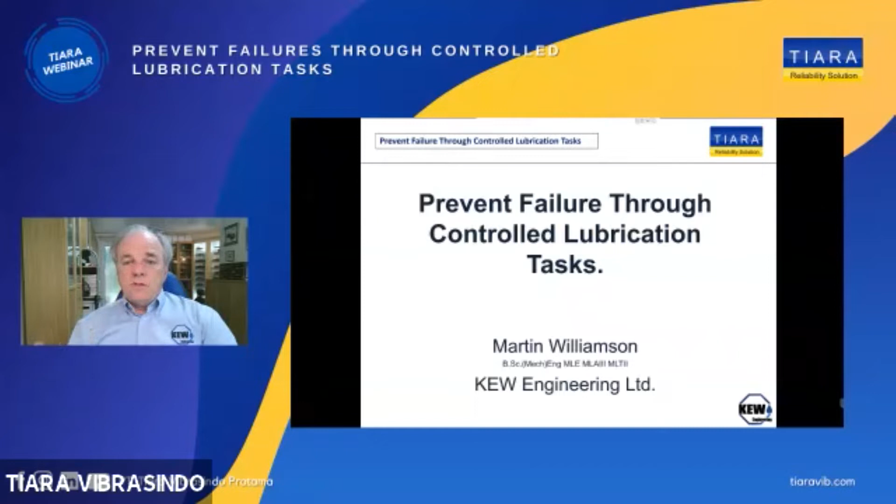Thank you and welcome to the presentation, introduced by Chandra, about preventing failure through controlled lubrication tasks. As you saw from the introduction video, we need the knowledge to do the job right, and part of that would be training. But the other part is also providing procedures and steps so we get consistent performance. As an overview to this webinar, let's look at why we need procedures, how to create them, and where all of this fits within ISO 55,000, particularly where the new ICML 55 standard fits as a subset of ISO 55,000.

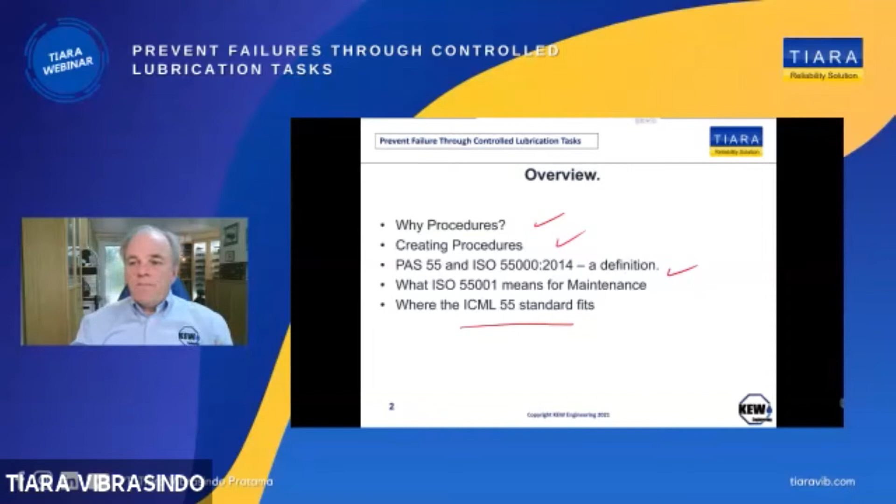So if we begin by looking at why procedures, why do we need procedures in the jobs we do? Well, research done by Drew Troyer, a good colleague and friend of mine, for an article on Reliable Plant Magazine looked at the issues with what goes wrong in the plant, why people perceive things go wrong. Part of it was procedural problems, not having the correct detail in the procedure. The other part was personnel and human error, not knowing what comes next, not being properly qualified and trained. There were other issues too, which came down to training, design, and management oversight, all discussed in that introduction video.

The ones I want to focus on here are the issues relating to the procedural problem and the personnel issues, because clearly if we have properly documented procedures for our tasks, then we get consistency and there's no excuse for not knowing how to do the job right.

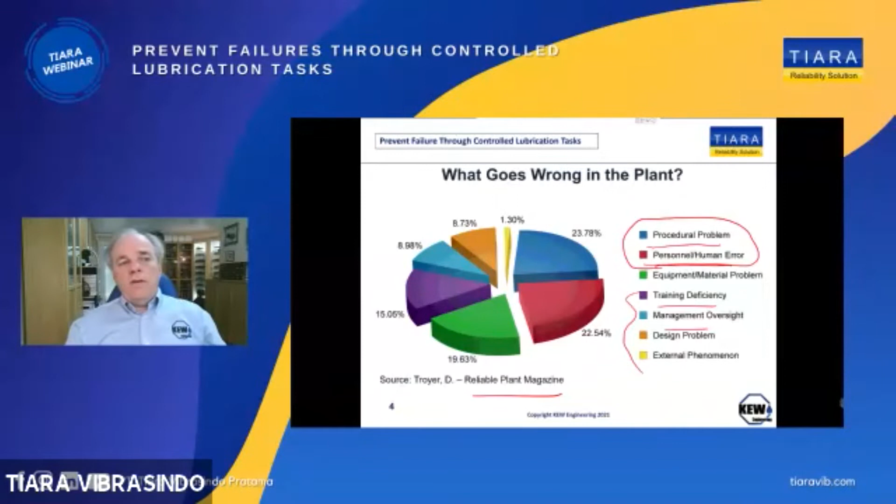You may think that greasing a bearing or changing the oil is a simple task, but there are so many things that can go wrong, and people will attempt to do these tasks in different ways. So what we want to make sure is we're providing the detail through the procedure to ensure that problem doesn't happen.

And of course, when we look at some of the typical human failures, our problem is we employ people because they have a qualification. We employ a maintenance engineer because he has an engineering qualification, maybe an engineering degree, and we expect that because they have that qualification, because they have that knowledge, that they also have the skill.

Skill is not something that you get with a qualification. You get your qualification from university, from college, that qualification says you know the knowledge associated with the work. But what it doesn't do is it does not give you the skill to do the job.

And the skill comes from learning from other people in the workplace. So hence you have your mentoring programs for your new employees. Your older personnel, the people that have been employed for some time, will act as a coach or a mentor or a tutor to show people the actual skills they need for the specific task.

And this is where the differentiation lies. We can have knowledge, but that doesn't mean we have the skill. We have to acquire the skill by learning on the job.

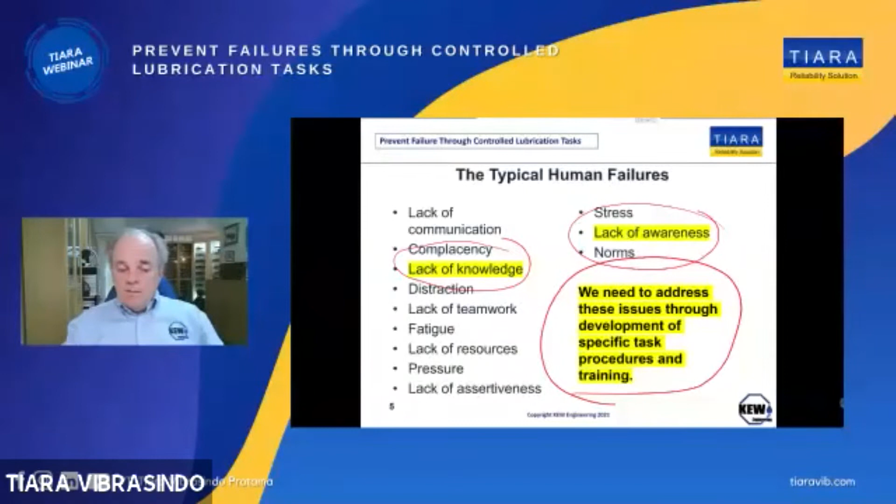Because at the end of the day, our goal is to do the right work in the right way. Because often we're doing the wrong work in the wrong way.

For example, we have a lot of planned maintenance activity, and we carry out the planned maintenance tasks without properly understanding why we have to do that. And that planned maintenance activity sometimes is not necessary, and sometimes it is necessary, but it's knowing the difference between the two.

And this is where we need to have procedures to identify that, standard work plans and procedures that help to identify when the work is necessary, but then to make sure that the work that we're doing fits with the tolerance, the quantity, the quality, the materials and the tools, that we have the right tools to do the right job in the right way at the right time.

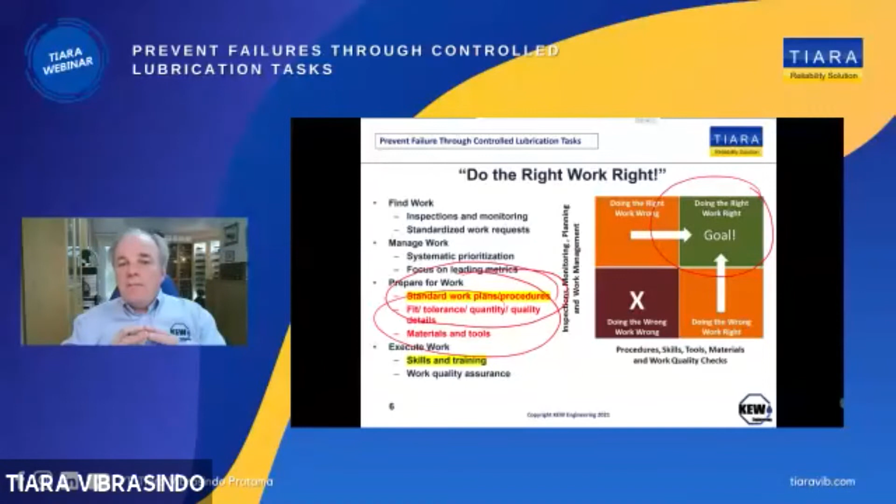So the actual purpose then of the procedures, I think, is fairly clear. And therefore, we need to look at how we can develop these procedures. And ISO 55000 is about having these procedures in place.

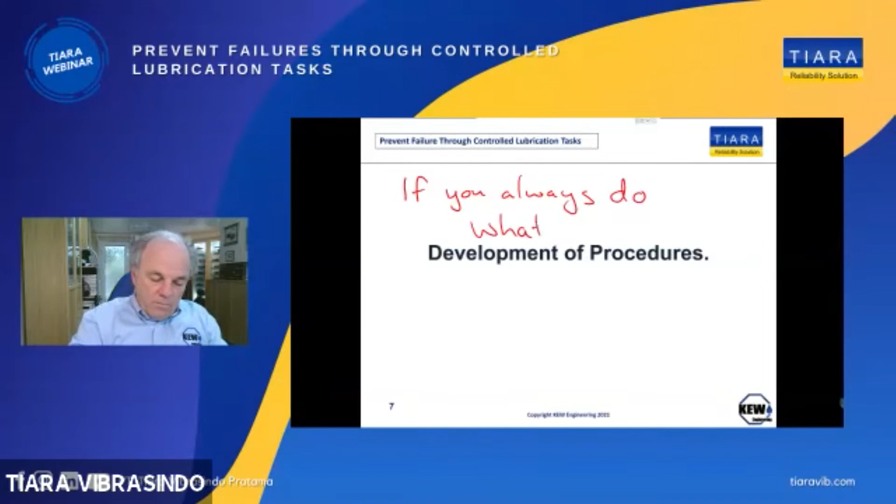The thing is, what we want to avoid is simply documenting what we already do. If you always do what you've always done, then you'll always get what you've always got.

Now that sounds a little bit long-winded, but what we're saying is, if you don't change what you've always done, you won't find improvements. Improvements come through changing what you do.

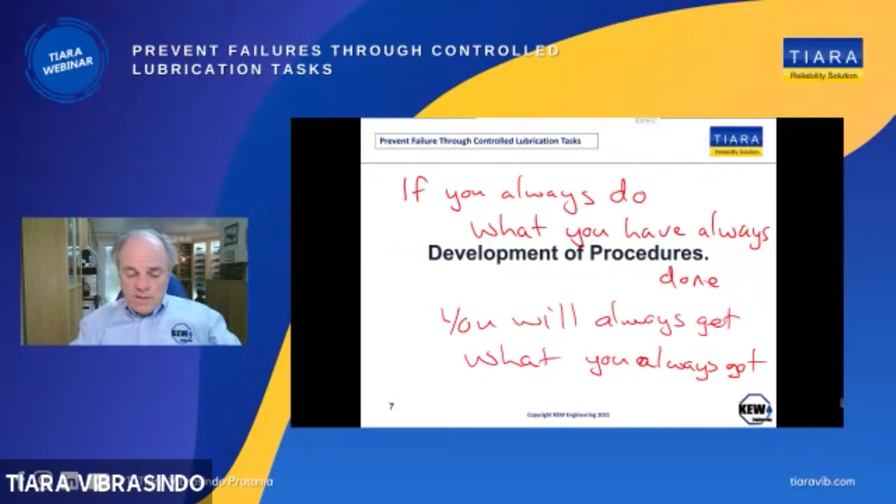So what I'm trying to say here before we start on the development of procedures is don't simply write down what you do. It's a good starting point, but if you want to bring improvements, you have to change what you do. And that means keeping in mind that as you develop your procedures, always be looking for a better way to do the task so that you can achieve the reliability gains, the reliability improvements with your assets. So looking at the whole process of developing procedures, remember that consistency creates reliability.

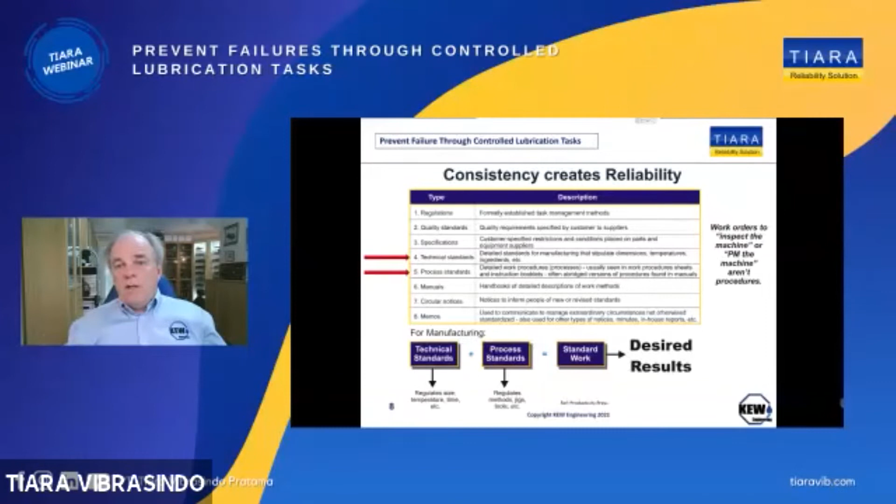One of the things I see in a country like Japan, they have a very high track record of reliability. But what I have realized is that they have achieved that reliability through consistency.

They will always follow a written task. They will always complete the process following the instruction. They don't attempt to take shortcuts. They don't attempt to rework it. They simply follow what's in the procedure.

But that consistency brings reliability.

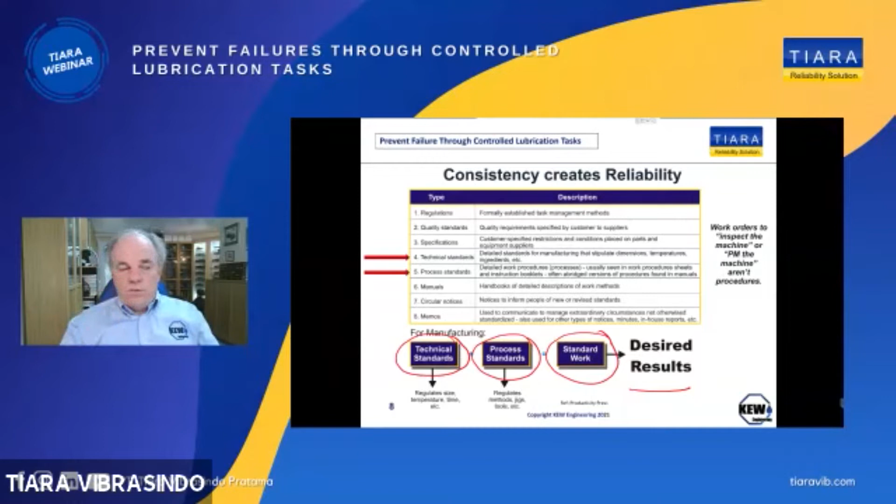In terms of procedures for maintenance, we expect to find these desired results by taking the technical standards and the process standards to create standard work. That's our desired result, the goal we're trying to achieve. The technical standards are detail standards, manufacturing standards that stipulate dimensions, temperatures, ingredients. The process standards are the detailed work procedures, usually seen in work procedure sheets and instruction booklets. By combining that, we can start to put the detail in place for our maintenance procedures.

And the benefits of procedures-based maintenance is that with these written, documented, and controlled procedures, we end up with a clear defined preferred practice. We have consistency and continuity, and we reinforce what we want as best practice. It also helps define the training and certification requirements needed to undertake the task. Most importantly, it enables improvements in safety, in environmental compliance, and that has a major impact for climate change. So clearly there are a number of benefits that relate to having controlled and written documented procedures.

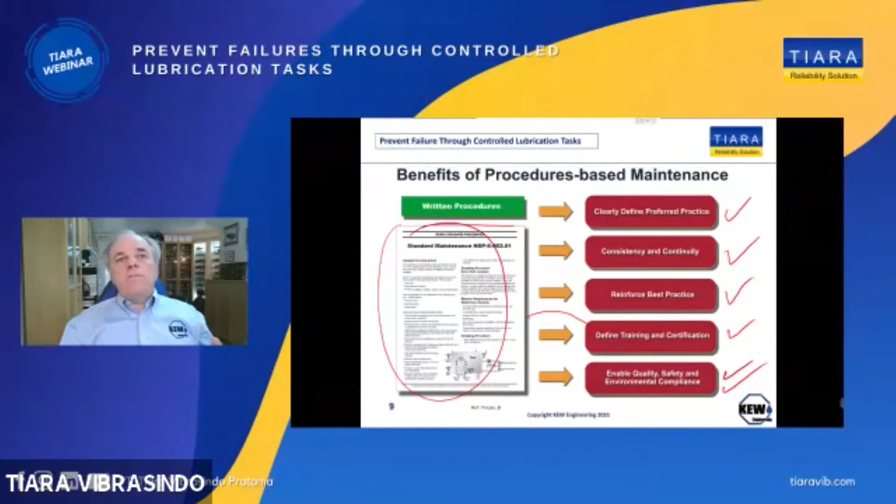When we look at a typical procedure, for example greasing an electric motor, a simple work instruction, we make the assumption that anybody can take a grease gun, walk up to the machine, attach it, and start pumping grease. But often we end up with guesswork because we don't tell people what grease they should be using, or what quantity of grease they should be using.

So in a very clearly defined work instruction, in a very clearly defined lubrication procedure, we have a number of steps: remove the dust caps from the grease fittings, clean the grease fittings with a clean lint-free cloth, inspect the grease fittings to make sure they're not damaged, and if necessary, replace them. Then apply that many shots or that quantity.

Now notice we don't just say shots, we say the actual quantity in grams or milliliters of the actual product to the drive end bearing, and the same again, but notice it's a different quantity for the non-drive end, which often happens on electric motors, especially one like this with a belt drive. There will be a difference in the quantity of grease to be applied.

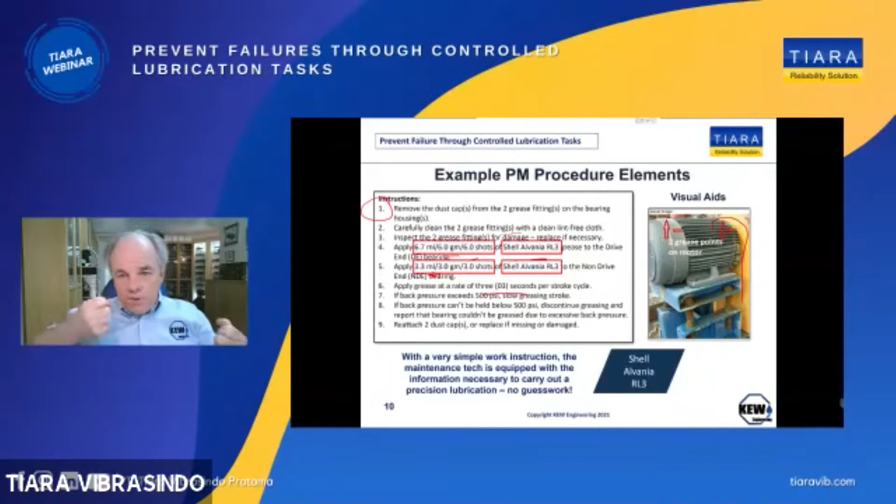And if we find there is back pressure as we're applying the grease, it could be that the feed tube is blocked with old hardened grease. So we're saying don't grease if there's too much back pressure, because that means there's a problem. And if we try to overcome that back pressure by generating more pressure, the grease gun is a powerful hydraulic tool that could then damage the electric motor if we were to persist in trying to clear that blockage.

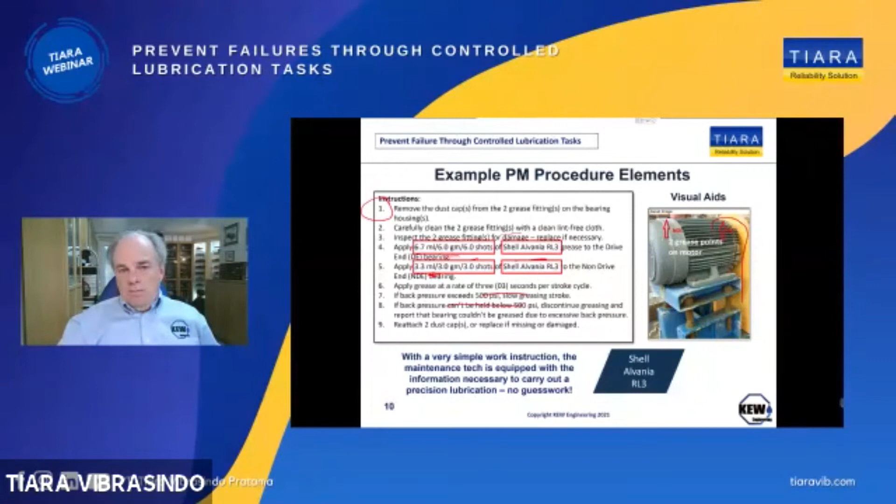So consequently, having these written work orders helps to identify the process. Now obviously, for someone who goes out greasing on a routine basis, this will become second nature to them. This will become straightforward, something they can remember without having to look at the detailed bullets.

And all they're going to want to see when they get to the machine is a reminder of how much grease goes in at each point. But the focus I'm wanting to give here is that with having this written procedure, if you get someone new to the job, they've got something they can reference on how to do the job properly. And it's also something the mentor or coach can use to show the pupil how to do the job right, and we've got that consistency then.

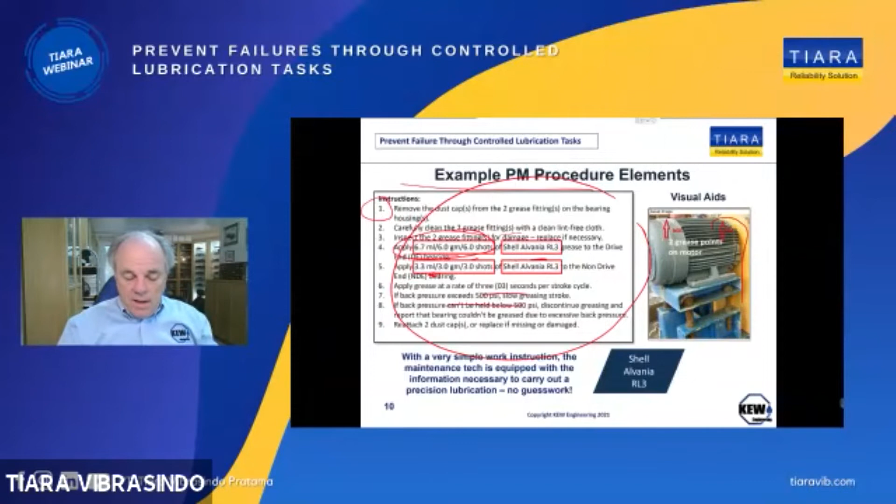That's preventing the heat dissipating from the motor, and that will in turn reduce the life of the motor. So there's lots of things we can be doing here.

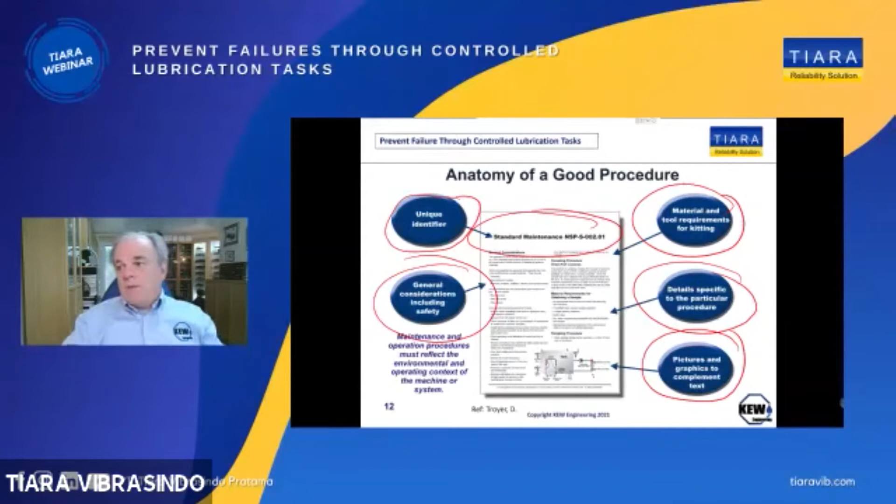So clearly then, in terms of the procedure, we want each procedure to be linked to a particular asset. And that means we need to make sure we put the detail there. As we say, the devil is in the detail, or the best practice is in the detail.

The wrong kind of procedure would be like this: check oil pressure, check temperature, grease the electric motor, tension the belt. But I have seen numerous work orders issued by the maintenance planner that look exactly like that. So for a typical conveyor, that work order I have seen a number of times, basically saying grease the electric motor, check the temperature, tension the belt, etc.

Now, what we really want is to ensure that we give the details. So confirm that the oil pressure is between those two points. Be more specific about what you want in the inspection process. Be more specific about where that temperature should be at.

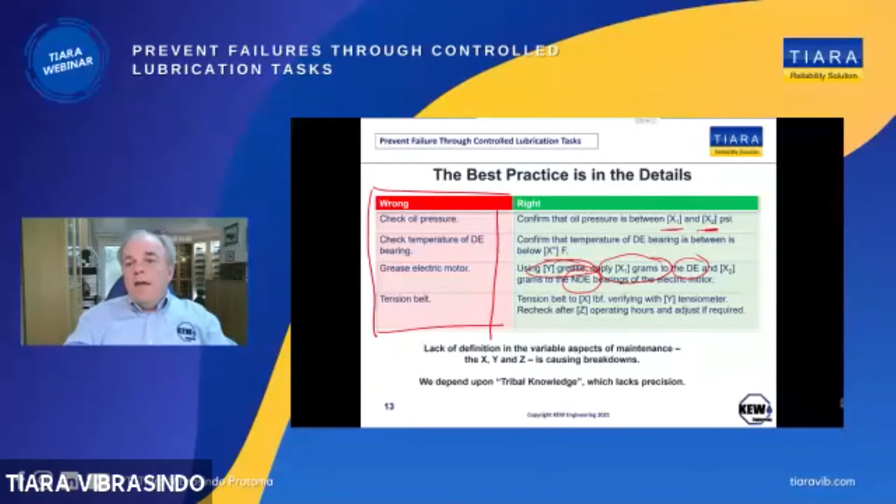And be very specific about what kind of grease, how many grams of grease, at which point, drive end versus non-drive end. And then when it comes to tensioning the belt, make sure we're specific about the tension required in terms of the force and how to check that, what tool to use, using a tensiometer.

Okay, so put the detail in the procedure, because it's the lack of definition in this kind of procedure that leads to the breakdown, because people will say, I didn't know. I did not know that the temperature should be below that point. I checked the temperature, but I didn't know that it should be that low or that high.

I didn't know that the oil pressure should be at this point. We don't give people enough knowledge. Avoid the tribal knowledge. Avoid asking your colleagues, and what should the temperature be? Oh, I think it should be 80 degrees centigrade because my machine's alarm trips at 80 degrees centigrade, so yours will be the same. It's that kind of thing that causes incidents, that causes breakdowns.

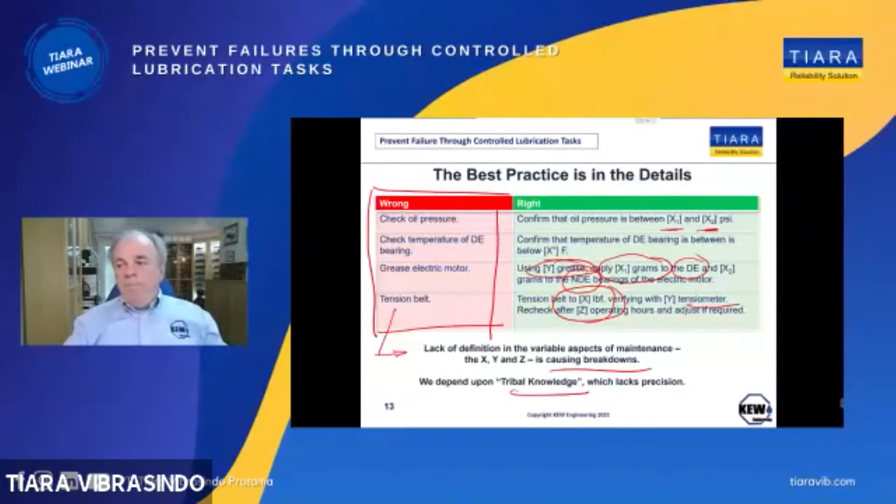Okay, so in terms of developing and setting up procedures, we have to start somewhere because it's a big program. There are lots of maintenance tasks that need to be documented. And even just for lubrication, in my experience, a typical plant could generate

2,000 lubrication tasks. And this is why the maintenance planner likes to combine these tasks into one work order so that they limit the amount of work order activity that's being created. And the problem then is that you get work orders that become multifunctional, that require a number of people, or at least a number of skills, to complete that work order. And at this point, it looks like a massive challenge, but actually we need to break it down into steps.

So we need to set up a tool to create our procedures. And in its simplest form, it may just be creating an Excel spreadsheet and creating a Word document with a mail merge function, and simply creating a template in Word to bring all the information from your Excel spreadsheet into your Word document. But once you've created the procedures, you've then got to manage the procedures.

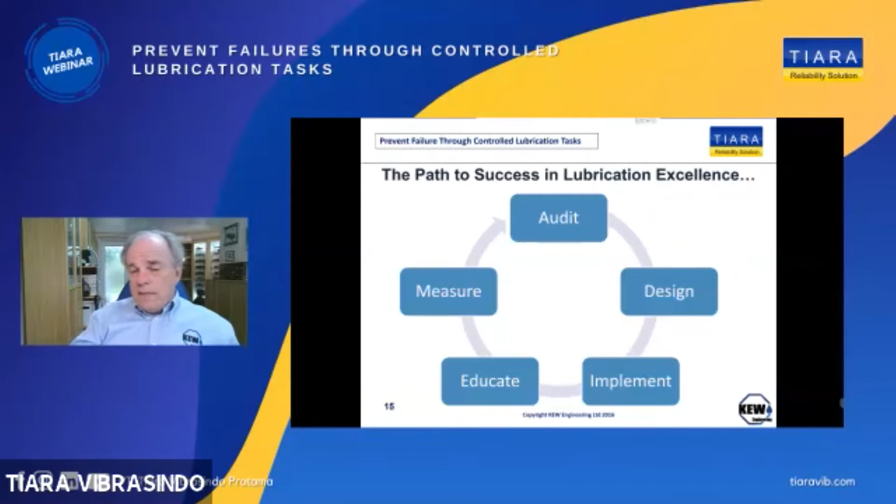We need to make sure we're always maintaining our database of procedures and keeping them up to date. So the first steps would be to audit your site, look at best practice implementation and design, then educate, measure, etc. That's the standard approach to achieving excellence in any category, whether it's lubrication or maintenance in general.

But when it comes to the actual steps, we'll need to follow some of these to create procedures. One step might be to consolidate the lubricants and apply color coding. Then survey the machinery to identify what procedures are required, and any best practice upgrades needed. Do we need to put oil analysis sampling on the machine? Do we need to move the grease nipples to a more secure, safe location away from the machine? Things like that.

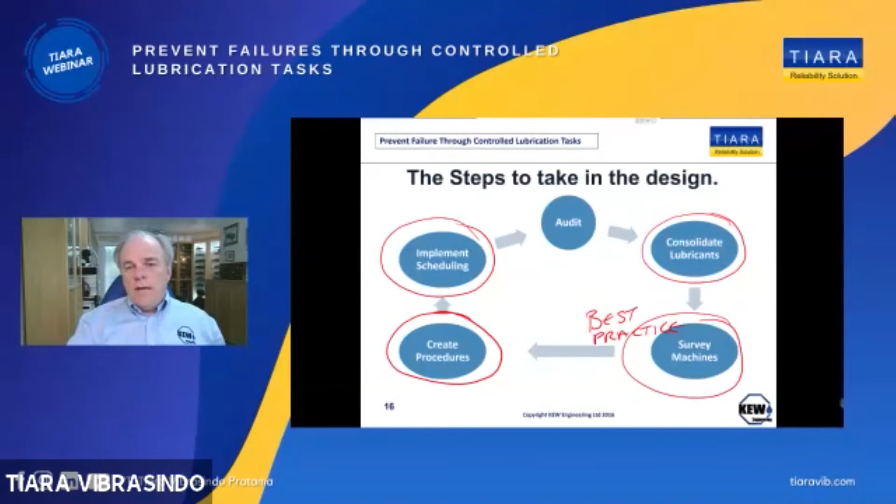And then we can go about creating the procedures. Once we've created them, we need to make sure they become implemented and part of the work order. These procedures should be part of the work order, giving instruction on how to undertake that work order correctly.

Doing an audit of your site will identify how you perform. In a lot of areas, handling and storage of lubricants are two key areas where most companies fall down. They don't score very well, particularly in handling, due to lack of staff awareness, lack of knowledge and skill, and lack of equipment to do the job right. This audit process can help identify where you need to focus effort.

But inevitably, in my experience, it's always going to be one of the key steps to implementation: creating procedures that allow for best practice.

In terms of consolidating lubricants, for those that have already done it, you could skip this step. But for those using lots of different oils and greases, why are you using so many different systems and products? It could be because of complying with the OEM warranty, or because your purchasing department is buying the cheapest product at the time. But what we want to do is try to consolidate.

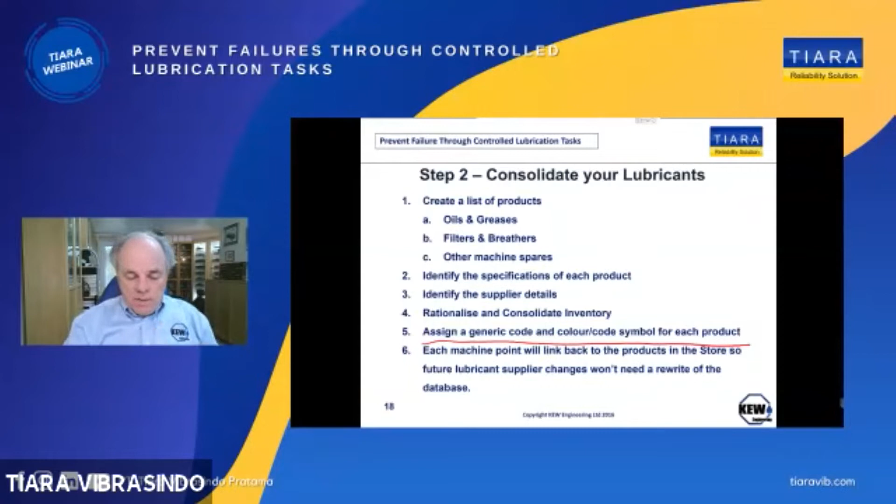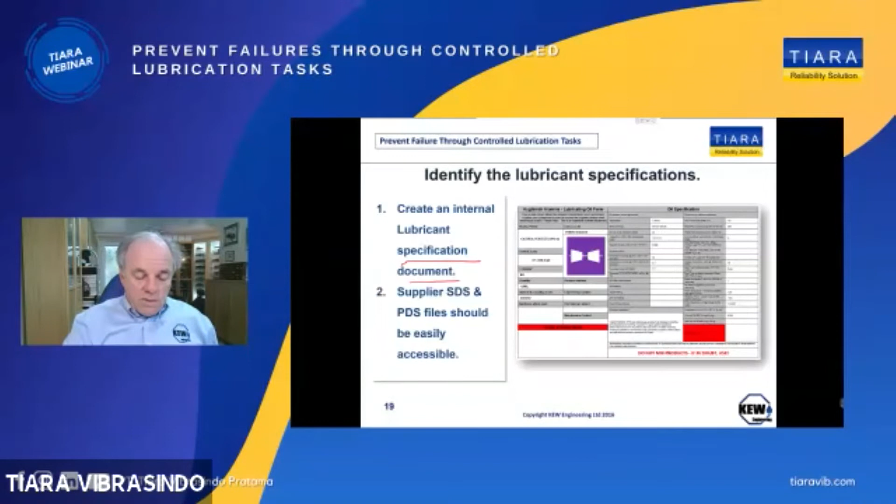So essentially, start by creating an internal lubricant specification document like you see here, and also add the supplier safety data sheet and product data sheet. By having an internal document like this, it becomes the reference—the guiding document for purchase. With this document, you are saying to your lubricant supplier, you must supply me a lubricant that matches the performance and meets the physical specifications of my internal document.

My internal document specifies the physical characteristics and performance properties of the lubricant that I want. So now you are forcing your lubricant supplier to supply you the product that you need, rather than them selling you a product they want you to have for a commercial reason rather than a technical reason.

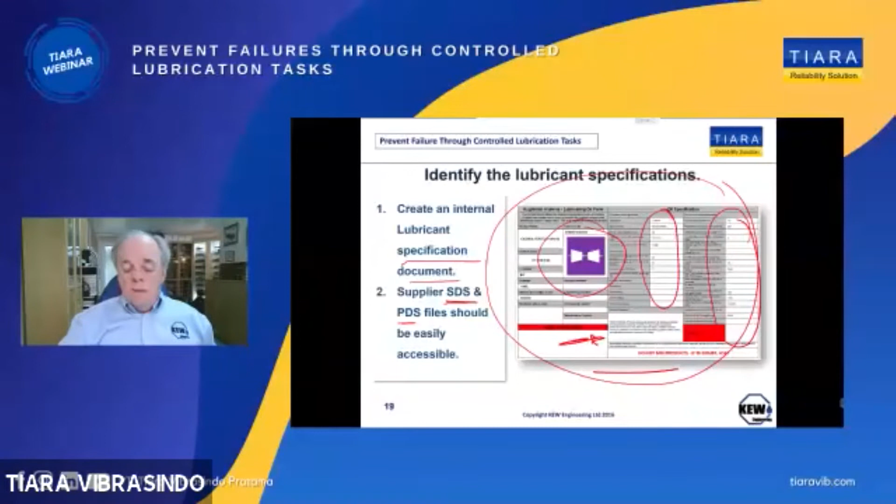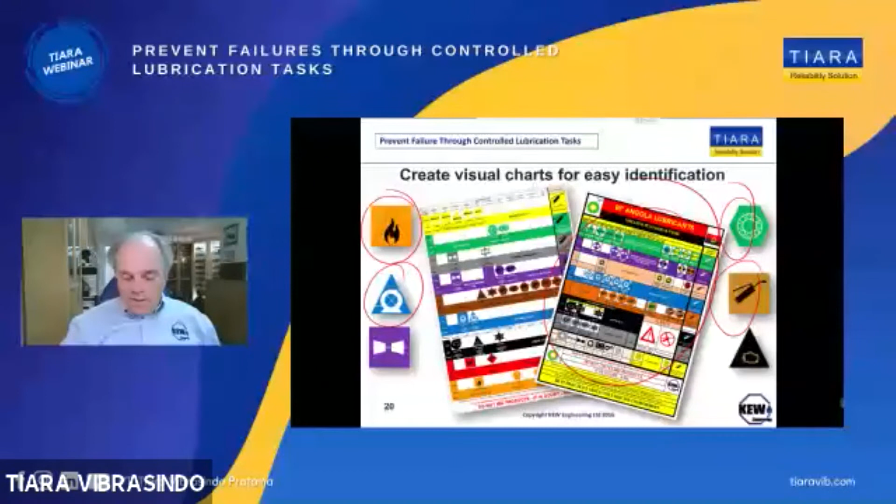Getting that color code is important, because we need to refer to that color code in our procedures. We may end up with a number of color codes all lined up on the document, which becomes our reference for all of our lubricants. We then use these symbols individually throughout the procedures, embedding them so that at a glance we can see which lubricant we're going to use within that procedure.

Now, each piece of equipment needs to have a procedure, so the first step is to map the plant. Most of you will be using an enterprise resource management system, whether it's SAP or Maximo, and you've probably got a functional location structure in place for your plant. The trouble with that is it goes down to machine level.

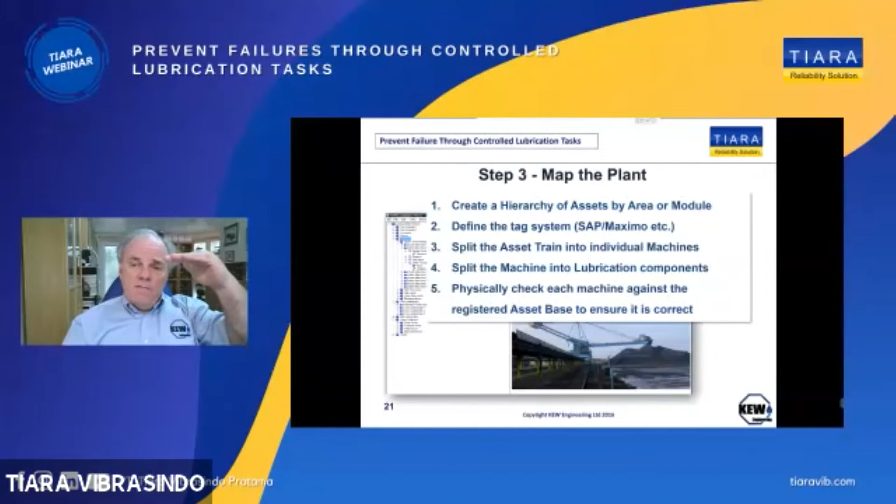It very seldom goes below machine level, but lubrication tasks are often done at a component level. So greasing an electric motor is not done at the motor, it's done on the bearings of the motor. An oil change isn't done on a gearbox, it's actually done within the sump of the gearbox. An inspection of the oil usually takes place within the tank on the turbine.

So what we're trying to say is that we need to have the plant hierarchy, but we need to be able to go to a level lower than the actual machine. So we need to split the machine components up into the lubrication related components as part of the machine, going below the level of the machine down to the lubrication component level.

Once we've done that, we can then begin to identify the actual required procedure. So we identify the asset's lubrication needs by looking at what the component part is. Is it a sump? Is it a reservoir? Is it a tank? Because for that, we're going to have to work out where we have the volume, the location of any drains, and any other associated parts that would be part of the procedure.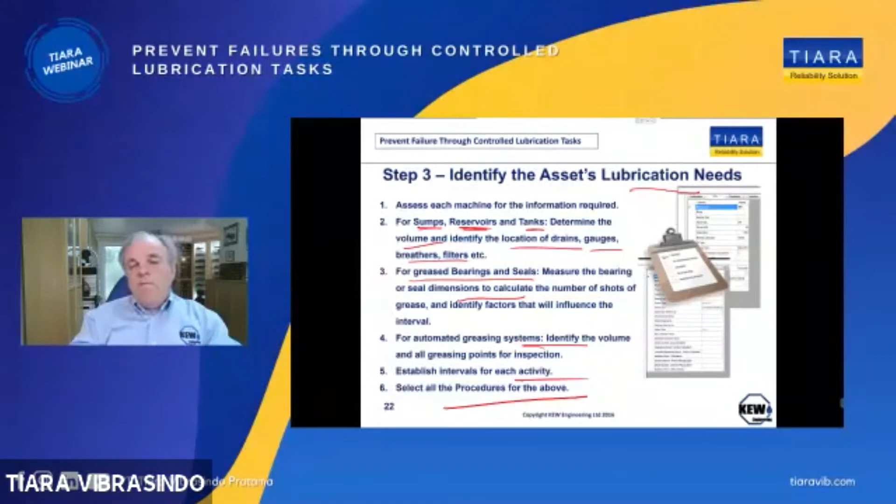Then for bearings, any bearings that are greased, we want to make sure we know what those bearings are so we can calculate the required number of shots, because a lot of times greasing schedules are incorrect. So we have to take the bearing dimensions and calculate the correct quantity of grease required. On automated greasing systems, we want to make sure we know the volume of grease required for the reservoir. And then we want to establish intervals for the activities and then create procedures for all of the above.

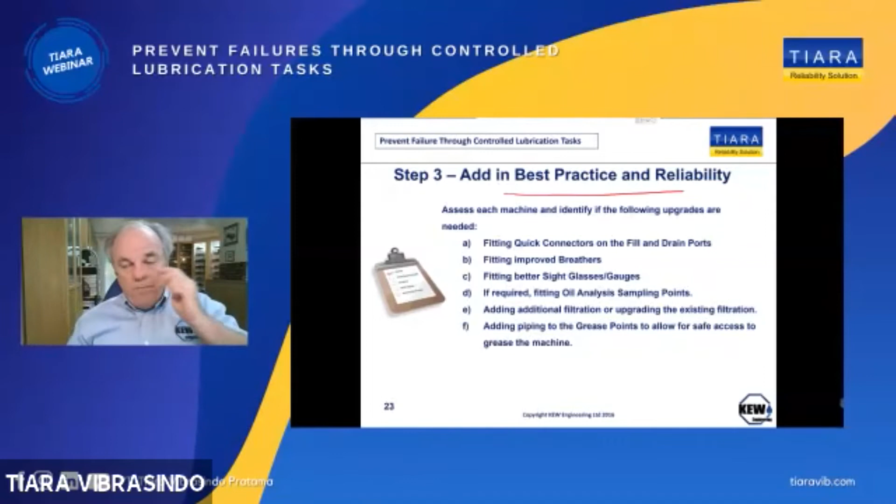We must also remember that when we look at things like your tanks, your sumps, your reservoirs, there are some best practice upgrades that we can put on the machine to improve reliability. For example, putting a quick connector on the fill and the drain port would allow us to attach a hose so that we can pump the oil into the machine through the quick connector, with the hose securely attached to it. That way the hose won't come off or slip off the system, and the oil will stay inside the hose going into the machine, which will prevent contamination of the oil as it transfers into the machine. That is standard best practice in companies we would consider world-class leaders in lubrication excellence. So it's things like that, fitting an improved breather.

The existing breathers are frankly rubbish and a waste of time. The OEM puts them on because they're cheap, and the OEM isn't that concerned about stopping the dirt because you'll have to buy spare parts. So we can improve the breathers. We can improve the situation with sight glasses. For example, we don't like using dipsticks. If we can avoid it, get rid of dipsticks, because it means lifting the dipstick out, wiping it with a cloth, introducing contamination. So sight gauges are a big improvement.

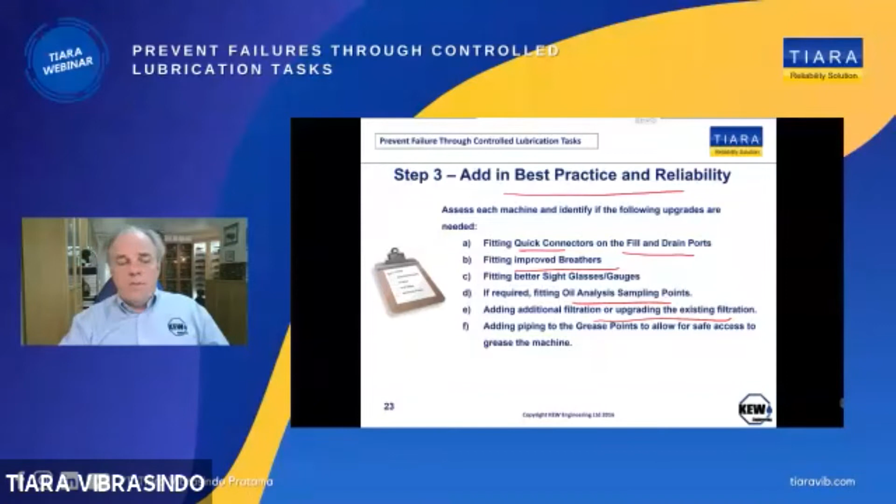And of course, as we said, if required, oil analysis sampling points should be considered as well. It may be a case of upgrading existing filtration for the same reason as upgrading the breathers. And also grease points, as I mentioned, it may be a case of extending the grease point to a safe location. We've seen instances where in order to grease the machine, it must be stopped because the safety guard has to be removed to get to the grease point. It makes sense to just lift the grease point on an extension tube above the safety guard so that it can be accessed while the unit is running, rather than having to stop the machine and interrupt production.

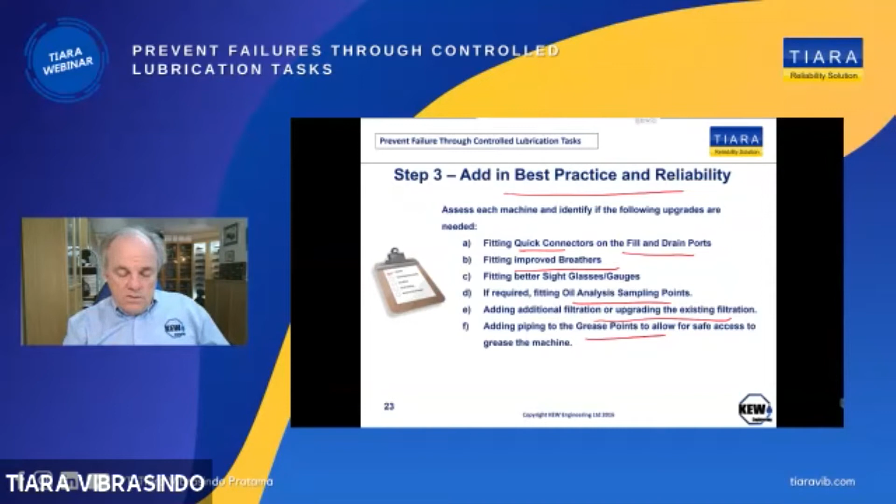Now, of course, with our procedures, we want to ensure that we are bringing in the 5 rights of lubrication. And the 5 rights of lubrication are the right lubricant, at the right time, in the right quantity, at the right place, and above all, with the right attitude.

So with the right lubricant, color coding should make sure that's going to be in the procedure. At the right time, we want to make sure things get done on time as per the schedule, so our procedures will identify the intervals required, which will then be put into your work order planning system. In the right quantity should be detailed as part of the procedure. And at the right place, there should be a photograph highlighting where the right place is, and the right place should have its own little tag identifying the quantity and the type of lubricant.

And of course, the procedure then helps to ensure that we are applying the right attitude to the process, that we are dealing with consistency to get that reliability.

So in terms of lubrication tasks and scheduling, some of those tasks are going to be planned and preventative work. That's typically general greasing of bearings, or oil changes on small volume machinery. So those are the typical planned lubrication tasks. We still want procedures for them, but that's the kind of task we might associate with that kind of machine. On the other hand, on more critical machines, we may go for a condition-based lubrication approach.

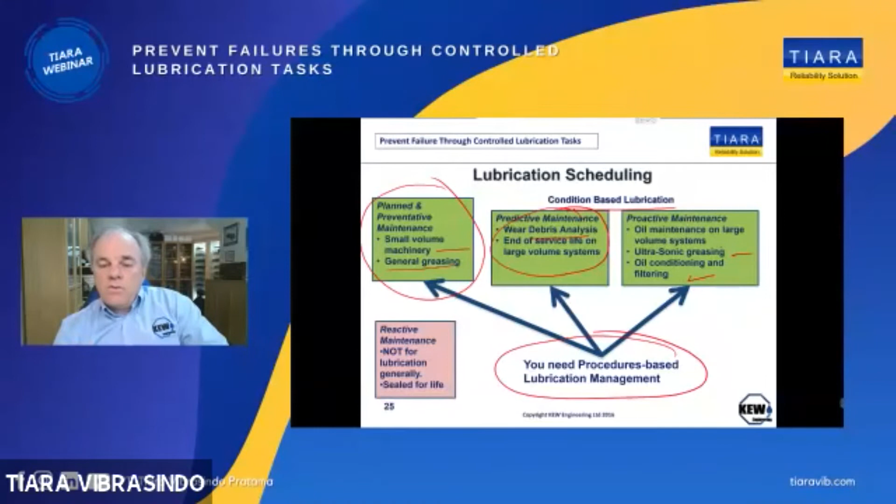So basically we want to make sure our procedures cover all of those aspects of how to do the job correctly, so that we get consistency in the process. So when we've mapped out the plant, identified all the machines, and identified all the lubrication points on each machine, then we can start to put together our actual procedures.

We want to make sure the procedure is identified, along with an identification of what skill level or resource level is required. For greasing, it may be a general lubrication technician. But on the other hand, for something a bit more complicated, we might assign it to a mechanical technician or an electrical technician. Maybe the electrical technician is the one who will grease the electric motor.

We want to make sure we also enter a time to complete the task, to assist the planner for the work order management. And then we should also make sure we put a priority on the task.

Why a priority? Well, there will be times when there's a shortage of resource and a work planner needs to know whether the task can be pushed back. Now, unfortunately, lubrication is often pushed back. So when it comes to greasing, planners have a habit of skipping the greasing schedule because they don't see it as important or as a priority.

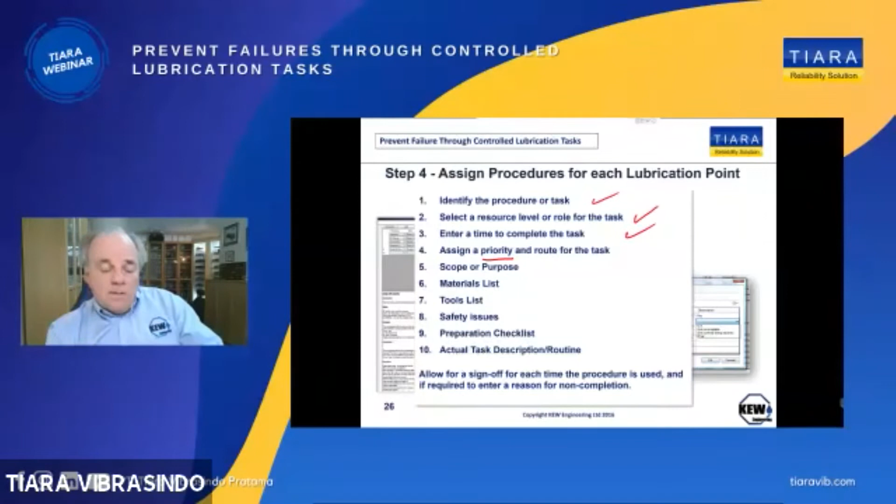So we want to make sure we have that priority attached to the procedure, so we can say it can be pushed back by one week, it could be pushed back by one month, or it could be skipped altogether. Unlikely, but we need to give some sense of priority about the task.

But also for work order planning and efficient time utilization, we should also make sure that task is part of a route. That route being a route that you follow through the plant to do the actual work, because we're going to group some of these tasks together.

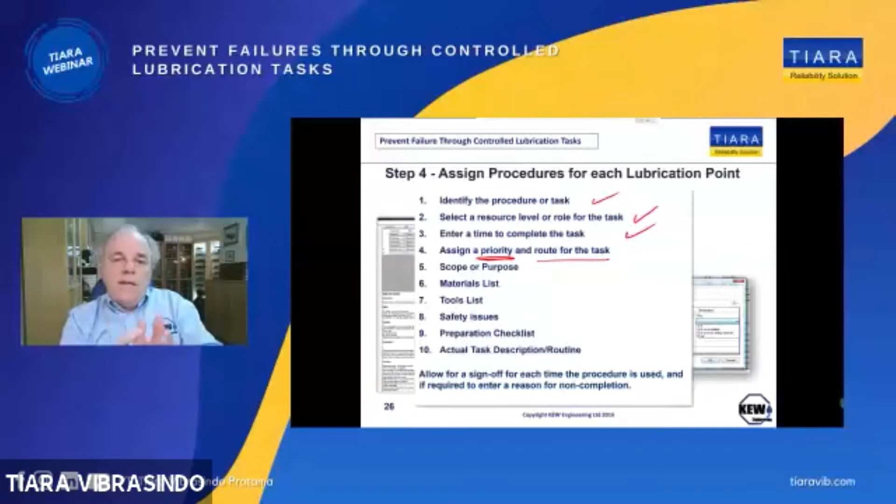So for example, it would make sense to take all the greasing procedures using product X as a grease, and then ask the lube tech to go and do that greasing with that grease gun, following a route through the plant that is most efficient for greasing all the units.

Don't forget, of course, also scope or purpose for the procedure, materials list, tools list, but very importantly, any safety issues associated with doing the task that the person should be aware of when they start to undertake it, a preparation checklist, and then of course the actual task description routine. All of this is very important as part of the procedure.

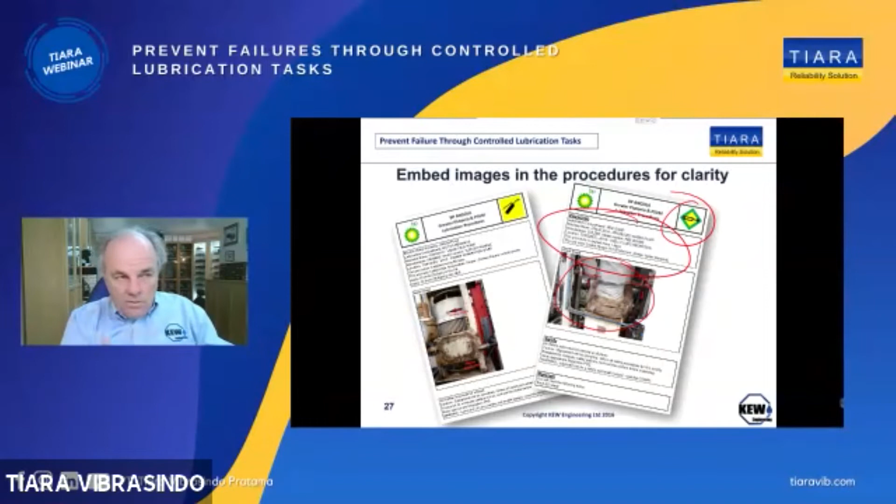Now, we've not sat down and individually typed out each of these documents. What we've essentially done is a merge of information into a template, because to be honest, the actual specific steps are all fairly similar. So it's really just a case of bringing in specific detail to this template, such as the image, the information about the oil, the actual component name, the tag number, the quantity of lubricant, etc.

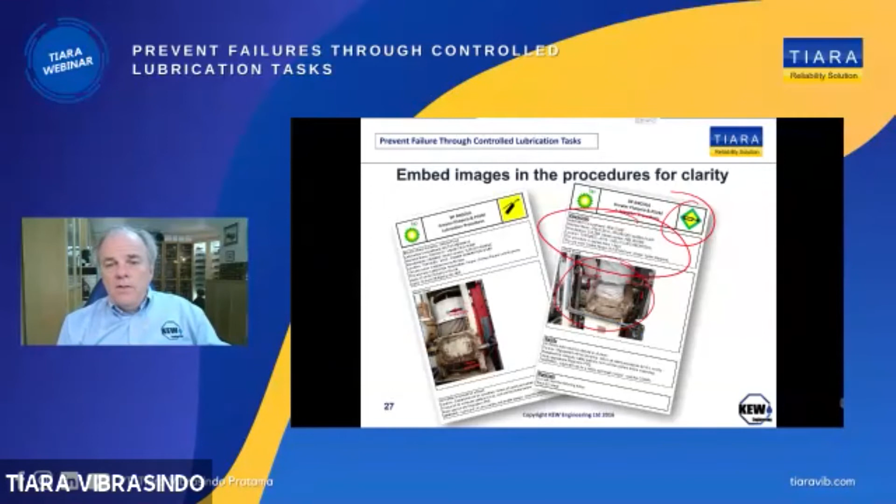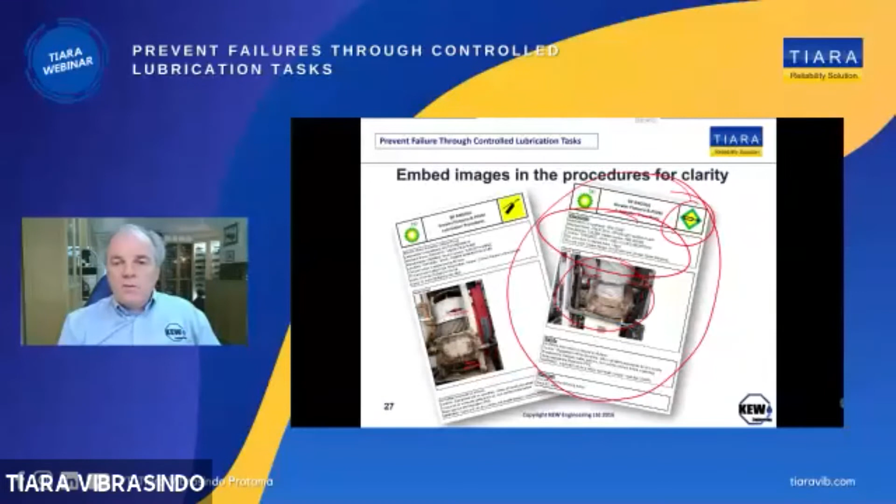Once we've got all of that into our software tool, we can generate these procedures very, very quickly. I've done this a number of times for clients using a tool I have, Cubic, where it allows me to do things, not just create these procedures, but add in tags for the machine.

So now we've got a tag for the greasing of the air blower bearings, that we can generate and hang off the actual greasing point, giving the specific detail as a reminder of what should be done, how much grease should be used, at what point, and the same again for tags for tanks, etc. Once we've got all this information into the database, we can generate the procedures literally in seconds using the template structure to bring in the specific detail.

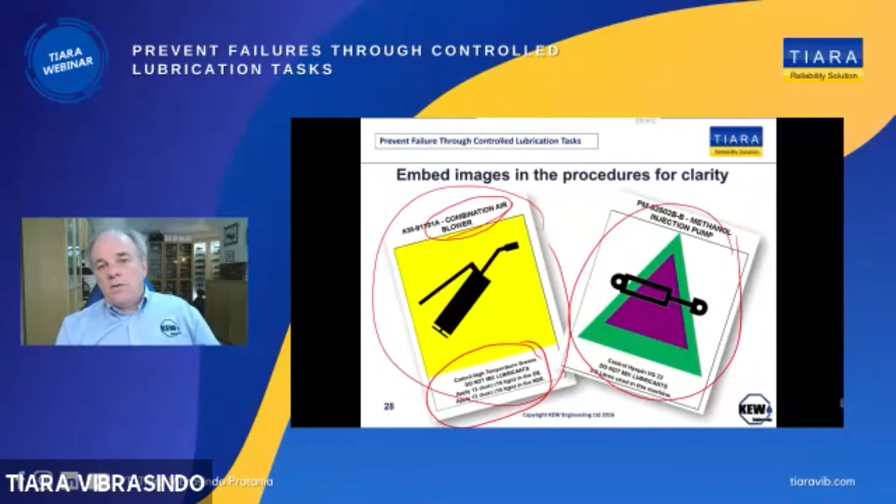And then we can create things like tags to hang on the machine. We can create other forms of tags that we can put on the drums of oil in the oil stores, for example.

But once we've got all of these lubrication procedures into the system, the planner can then begin to look at all of that information and make sure those procedures are attached to specific work orders. And of course, we have to make sure all of this works, that the routes are sensible, that the amount of tasks generated for each route are sensible and meaningful, and that we're not trying to overwork anybody or generate too much effort — that it is all manageable.

Now, once we've got all of that in the system, for reliability engineers, asset history is very important. Reliability engineers rely on the information that's been collected about the machine over the years. It helps them make judgments about which are the bad actors, which ones need the most attention.

But we can also make sure that we capture information about our machines when we go out to do these work orders, to do these procedures. A reporting system is very useful for that. It's also very useful for identifying what improvements need to be made. So if you've captured all of the information about best practice...

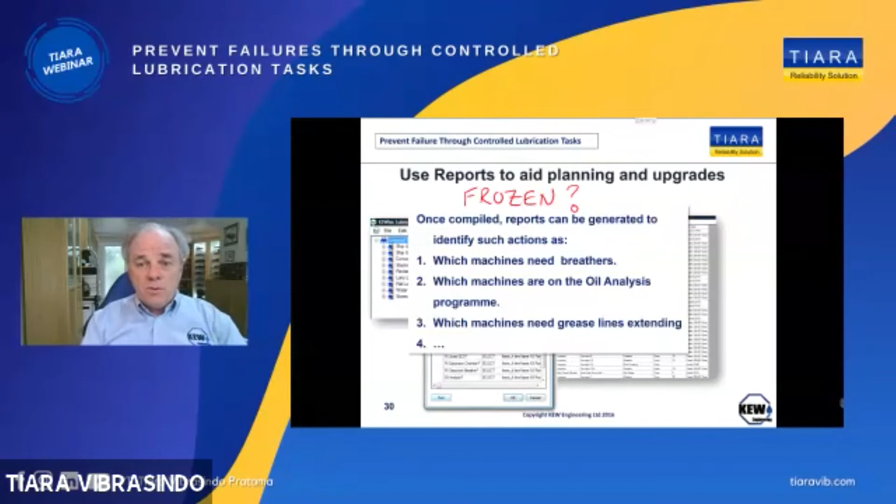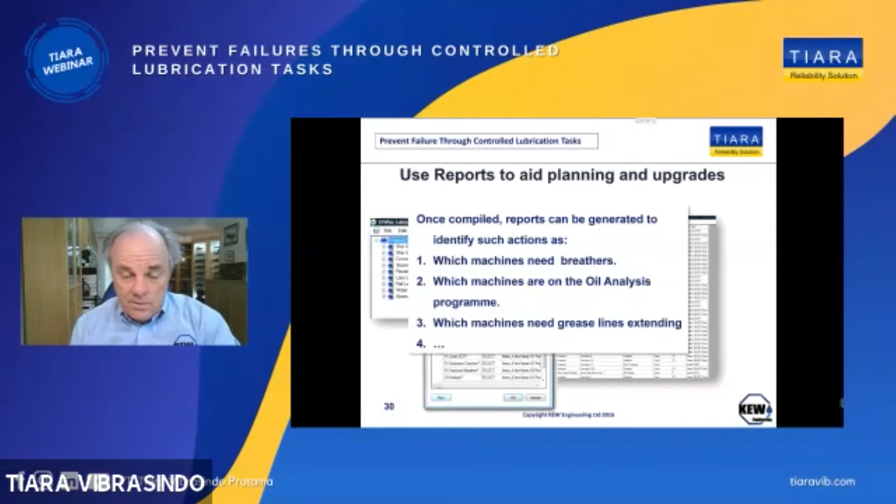We can clear that. So as I say, reports will be very useful to the maintenance planner, because the report will identify what upgrades will be necessary. Some upgrades can be done while the machine is running, but some might be required when the machine is actually down for maintenance, such as doing an oil change or something like that. Some improvements might need to be implemented as part of machine rebuilds. But don't forget, when we specify new equipment, we also want to make sure these fittings are featured as part of the new equipment specification.

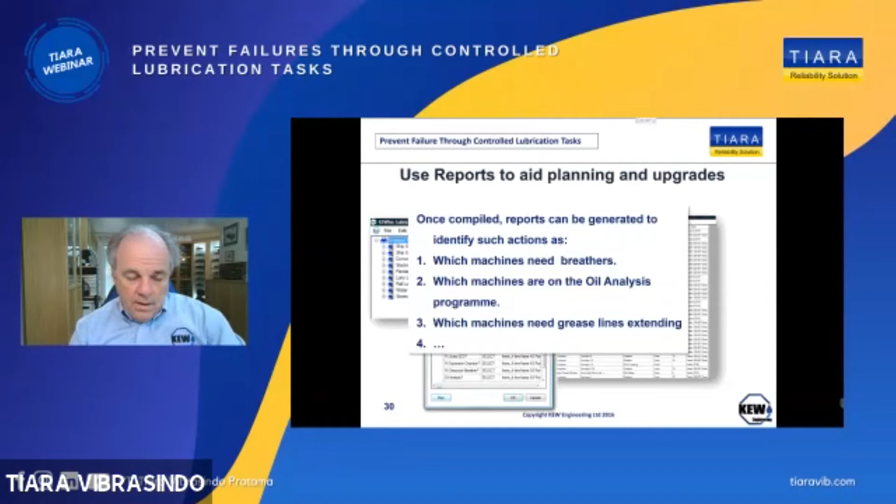In terms of the reports, they can also aid scheduling. They can identify when tasks are not being completed, what volumes of oil are in all the machines, what types of oil, and that can be run, and also just checking stock levels if necessary.

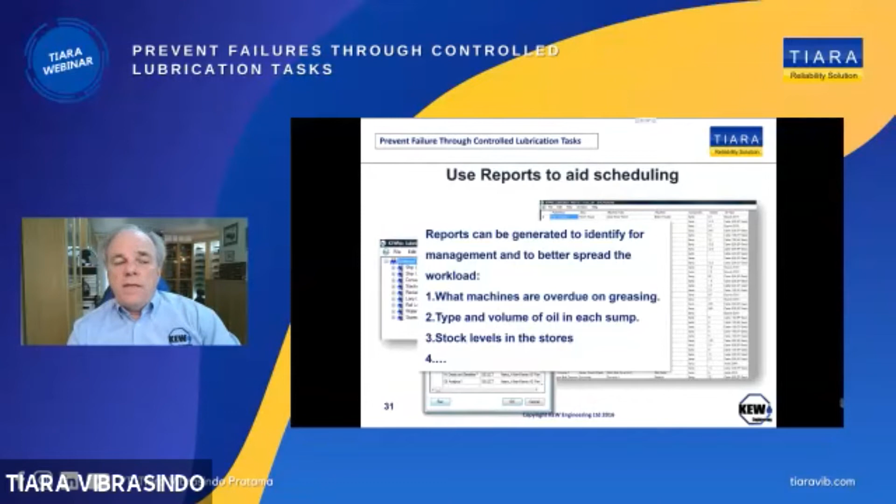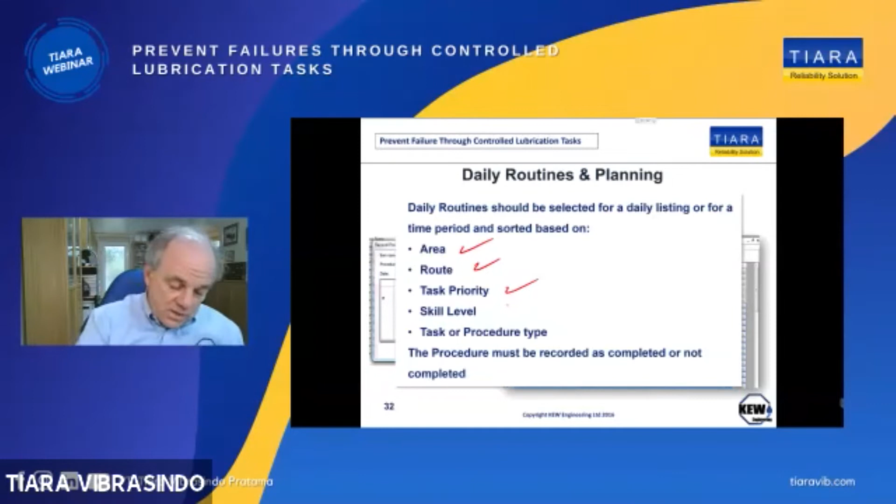The system you're using should make sure you can actually check up on these procedures. However, the daily routines and planning are obviously the job of the maintenance planner. Your procedures should identify all the information required for the maintenance planner — the area, which part of the route, the task priority, the skill level required, the actual task type — all of that should be available to the planner once you've created your procedures.

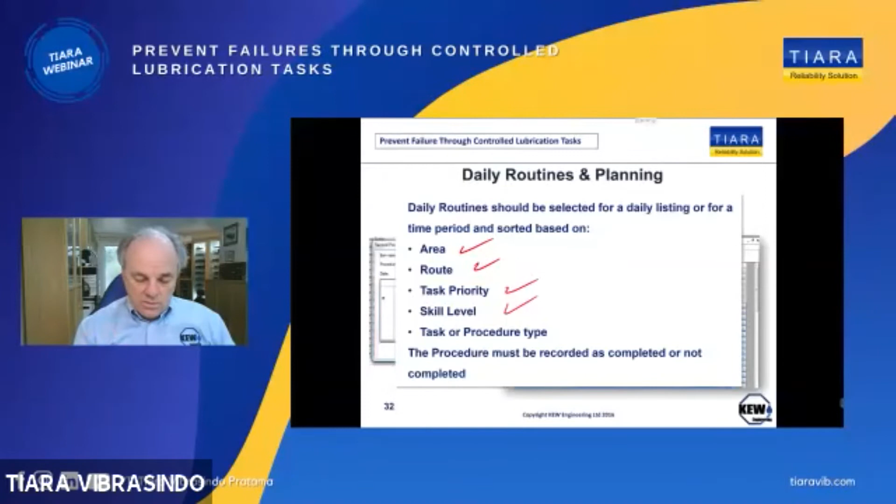Now of course also, like I said, reliability engineers want as much information as possible. So typically we want to make sure that when we're completing these procedures, we're gathering information. Like the example I gave earlier, I said motor dirty. Now if that was reported numerous times, why is the motor getting dirty? What's the problem?

Is there a way we can try and prevent that happening in the future? Or maybe motor running hot, because we can then start to collect the information, the feedback, because often when these procedures get completed, especially lubrication task procedures, they just get signed off as completed. They don't tend to gather information. But a lot of times your lube tech is actually at the machine doing these tasks and could be doing an asset inspection. And that asset inspection would then identify any other problems that need to be reported that can be acted upon.

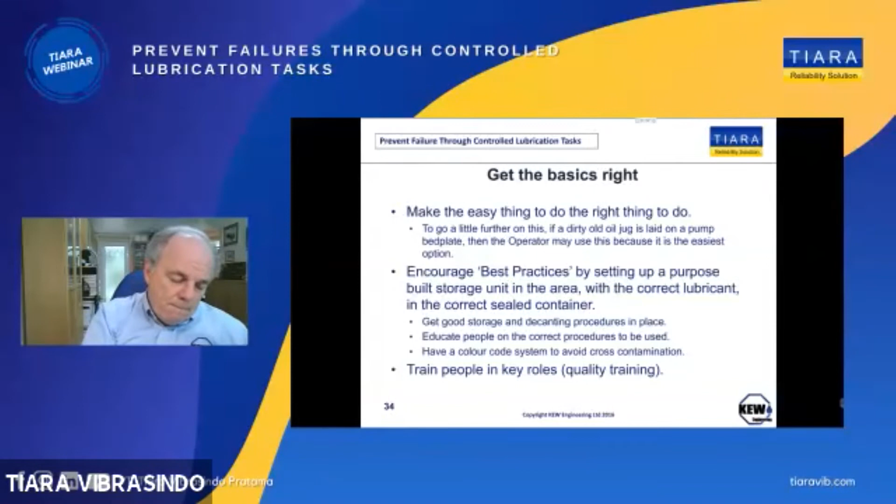So essentially, with the lubrication procedures, what we're saying is that we want to get the basics right. And the way to do that is to document what gets done. But the most important thing is make the easy thing to do the right thing to do. If you want to encourage people to take on a new way of doing a task, you have to make it easier for them. People are funny. We tend to do what we've always done because we feel comfortable with it, it's what we know. So in order to encourage people to do the right thing, make the task easier.

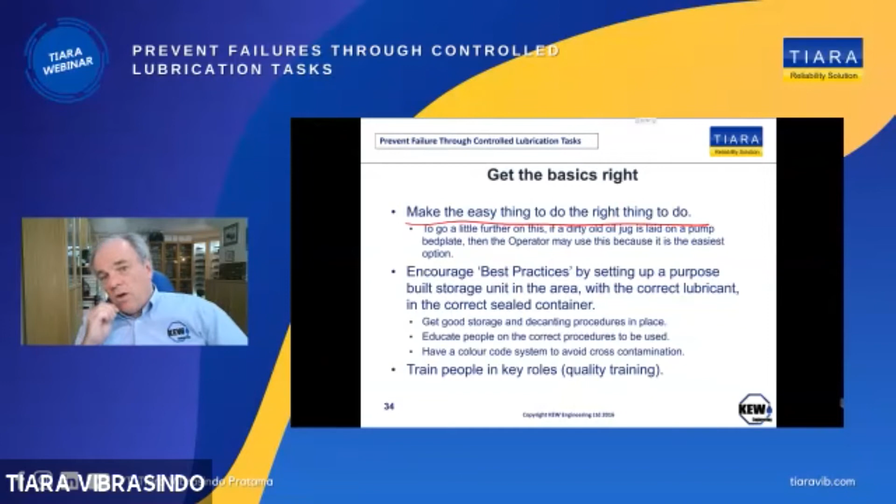For example, if an operator is leaving a jug of oil by the pump for doing top-ups, then that's probably his easiest option. Let's make it even easier. Let's make sure we provide the operator with small sealed bottles of oil in a box that he can keep at his workstation. Then he can take one, fill up the pump, and that's it, job done. We're not leaving an open jug of oil beside the machine. We are providing him with sealed, pre-filled bottles of oil that are clean, that he can use, and he puts the empty bottle back in the box, and someone collects the box and refills the bottles.

So make life as easy as possible for everyone, because that way everybody will always follow the procedure consistently. If we make it complex, people will always look for a shortcut. And when people start taking shortcuts, then your procedures, you may as well give up and go home, because nobody's going to follow your procedure if it's too complex.

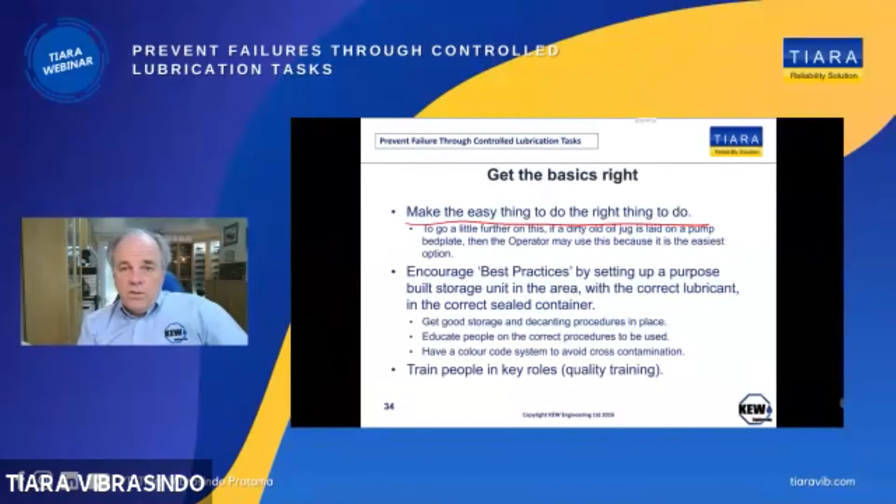Encourage best practice by setting up purpose-built storage units in the areas for the lubricants, so that in terms of carrying out these lubrication procedures, make sure that they're easily achievable, make sure that it is possible to undertake these procedures. And then, of course, make sure people are trained on how to use the procedures, but also in the knowledge required to use those procedures.

But remember as well that you won't make all of this happen on your own. Obviously, it's part of a team process, and there's a culture change required. So as you saw in the video at the beginning about ISO 55000, it is about a culture change. And so you need to make sure that you have a lubricant champion within the business, because that lubricant champion will try to drive that change forward. But also remember, like it said in the video, educate and lead by example. Make sure that everybody is doing the right thing and be seen to be doing the right thing.

So the next step then, of course, is how lubrication fits within the context of ISO 55000 and the new ICML 55 standard. So consequently, when I look at ISO 55000, I tend to think of it a bit like ISO 9000. Some of you are familiar with the quality standards, ISO 9000.

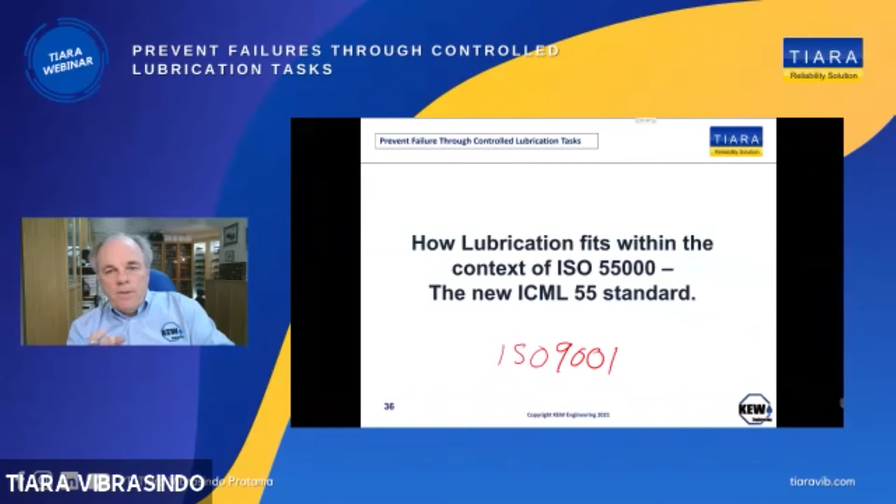Basically, ISO 9001 is a quality standard for manufacturing. And effectively, you are documenting how you're going to produce a product. So 9000 had benefits for the industry because it brought quality to production. We need something like that for maintenance. We need a standard that kind of brings that benefit to maintenance.

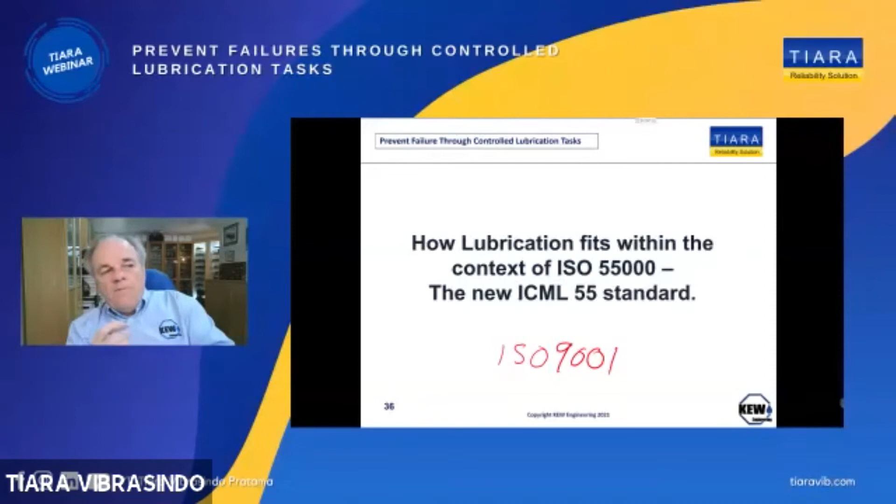And 55000 is an asset management standard. In fact, it started out as a publicly available standard, PAS 55, which of course has been superseded by ISO 55000. But 55000 was rushed through eventually by 2014 in terms of the disaster that BP had in the Gulf of Mexico. It was the result of that which drove the change, the cultural change, to have ISO 55000.

Now, at the moment, it's not a requirement. And just like 9000 was not a requirement to do business, but more and more customers kept saying, are you 9000 qualified? And I think what's going to happen is more and more people are going to be asking the same question going forward: is your business 55000 qualified? And of course, that will then have an impact on things like your insurance. And so the cost of doing business will be cheaper as a result of 55000.

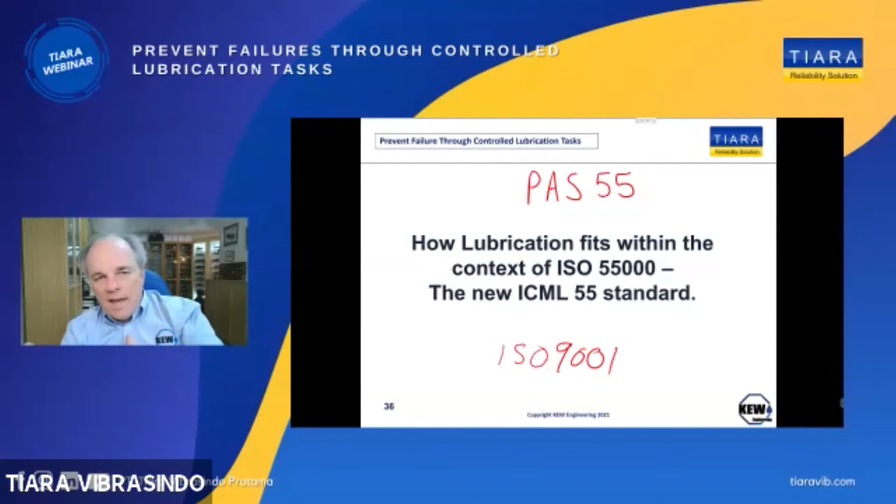But the biggest reason that business will become cheaper in terms of operation and more profitable is because of the reliability benefits that 55000 brings. 55000 was about asset management, and if you took the word asset and replaced it with lubricant, we effectively have ICML 55.

Now, many of you will be familiar with the International Council for Machinery Lubrication. Some of you may have undertaken the ICML examination process and become qualified as an MLA1 or an MLA2 or an MLT1 or even these days as an MLE.

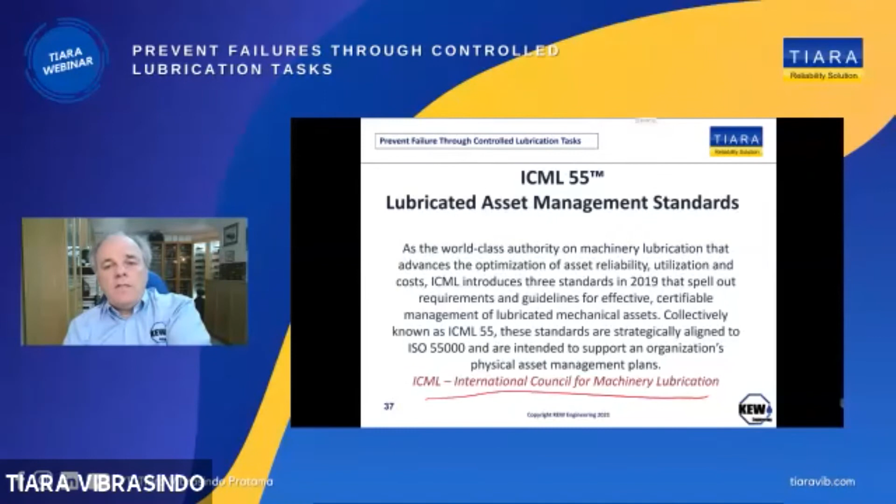So we have machine lubricant analyst, machine lubricant technician, and now machine lubricant engineer. ICML has been providing certification standards since 1999. But during 2019, ICML 55 was put forward. 55000 covers all assets, PAS 55, or publicly available standard 55, covered the physical assets, and ICML 55 is basically for lubricated mechanical assets.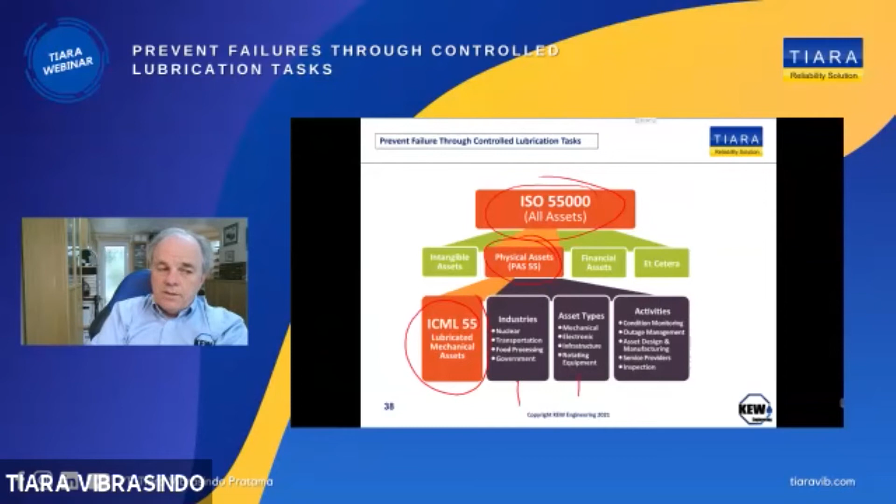From that, it covers a number of industries, it covers a number of asset types, and it covers a number of activities. So let's take a look at what the actual standard is. It'll be in three parts, and all of this is available on the ICML website.

All of this detail is there, but 55.1 is actually available now, and it is the requirements for the optimized lubrication of mechanical physical assets. 55 Part 2 and Part 3 are not yet available, but Part 2 is the guideline for the optimized lubrication of mechanical physical assets, so as opposed to the requirements, this is the guideline.

And then the final Part 3 is the auditor's standard practice and policies manual. To give you an example of where Part 3 would fit, if you remember when we were talking about procedures development, one of the things I said was the need for auditing. Just to give you a brief look back, where we were talking about was this.

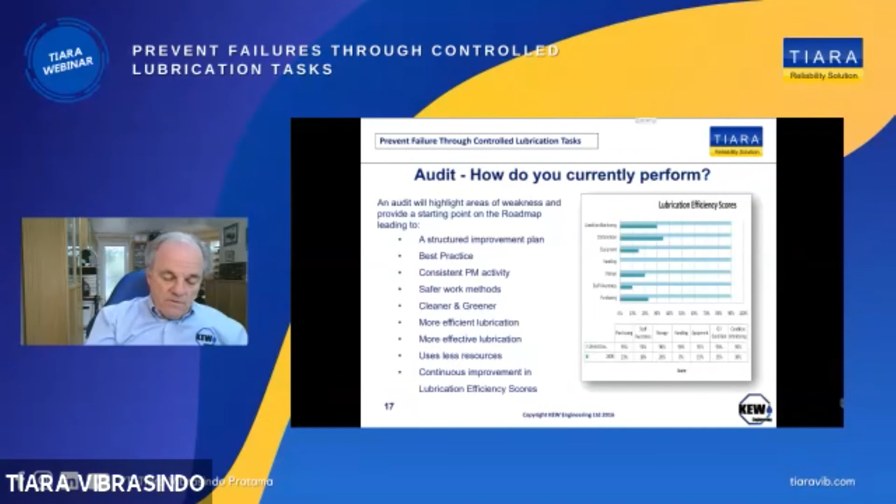So for example, in terms of the audit, how do you currently perform? Then 55 Part 3 will actually be about how to undertake those audits and how to benchmark, reference, and measure. So it will be much more of a comparable standard, whether I do the audit or whether one of my compatriots in the business does the audit from another company - it's a comparable measure.

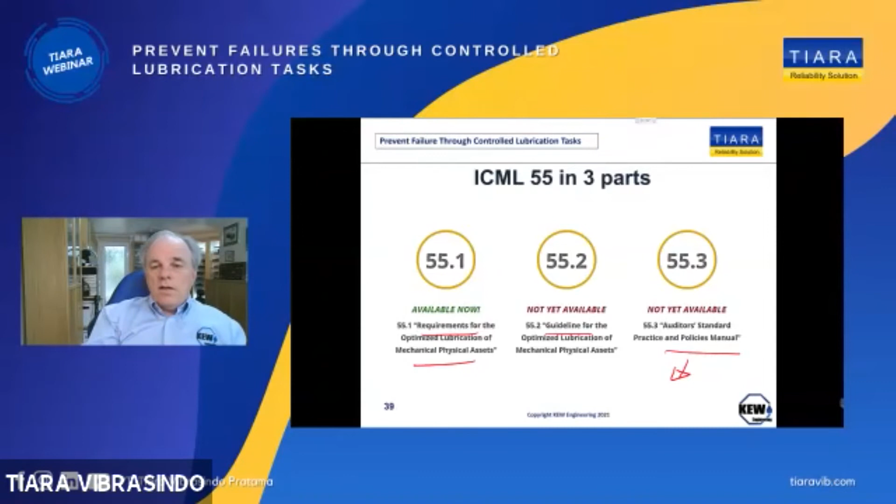And in fact, you as engineers would be able to undertake that audit yourself because you'd understand what those guidelines, benchmarks, and references would be.

Now, ICML 55 was co-authored by a team of 45 technical contributors. I was actually one of those contributors on the standard. And what it offers is a detailed, practical consensus of lubrication management systems and processes applicable to the effective management of lubricated physical assets.

So it takes a comprehensive look at 12 interrelated areas of what we would consider a sustainable, world-class lubrication program plan. And 55.1 is written as an enabling standard in support of physical asset management in accordance with ISO 55001. So you can purchase the ICML 55 standard from ICML or through Chandra - give Chandra a shout if you want to get hold of a copy of the standard.

So the 12 interrelated areas of ICML 55, and why it brings a benefit, of course: skills, the machine, the lubricant, the lubrication, and this is where we've been talking procedures - the actual tasks, and making sure that all of those tasks are documented and written up as procedures. It also covers the tools required.

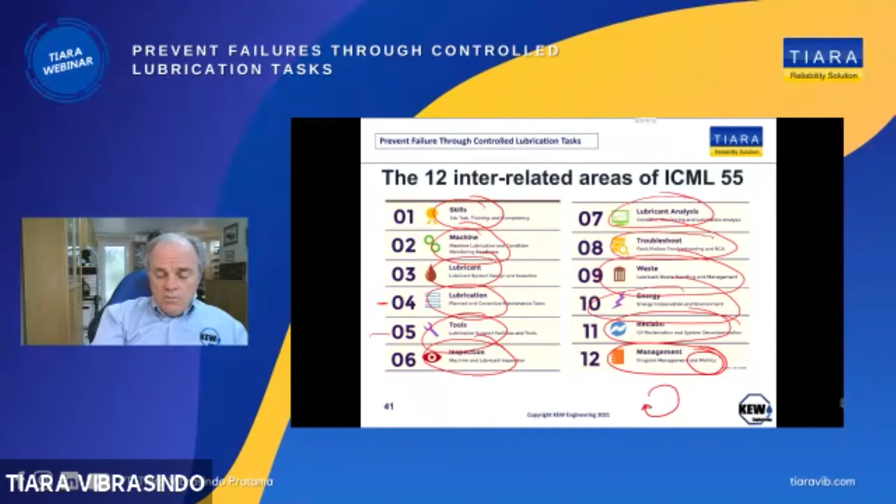It covers inspection processes, it covers lubricant analysis, it covers troubleshooting, and it covers waste management, also energy and energy conservation, reclaim or reconditioning of waste lubricants, and then, of course, the overall program management, particularly reference to metrics as a means to monitor the actual performance and make adjustments, because it's all part of that continuous improvement cycle.

Now, the benefit of ICML 55, if you're still not sure what the benefit would be: the adoption of 55.1, as augmented by the guidelines given in 55.2, will enable an organization to achieve its objectives of effectively and efficiently managing its physical lubrication and lubricant asset policies, strategies, and plans.

It identifies and defines requirements for what should be done rather than explaining how to do it, therefore allowing customization of the actual process to suit an organization's needs. So whether you're in power generation, oil and gas, or general manufacturing, you can take these and adapt them to suit your industry.

So whilst it's intended to align with 55001, the 55.1 standard is entirely a work product and exclusive intellectual property of ICML, and is not explicitly or implicitly endorsed by the ISO standard or any other standards body.

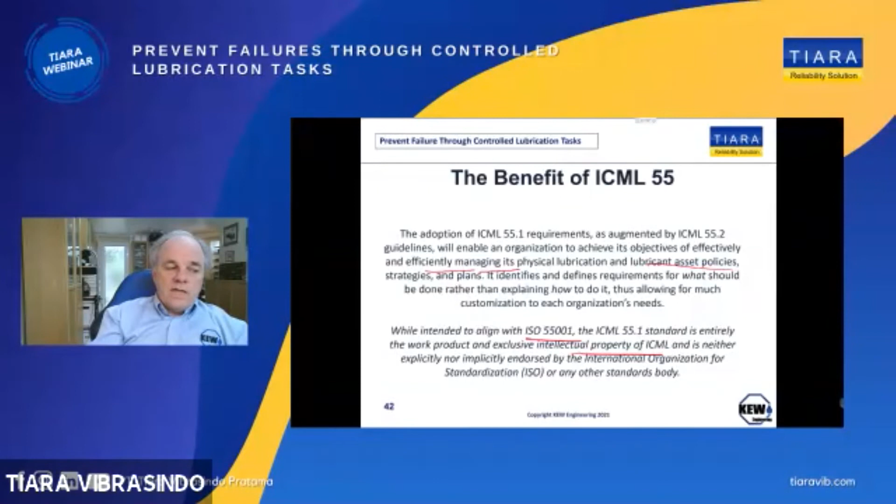So it's something that ICML have developed independently, and as it says, it's not endorsed by any other organization as such. But when you consider that you've got people like Jim Fitch from Noria and numerous others from the industry considered world-class leaders in best practices with lubrication, and dare I say it, even myself involved on the team, I think it's a fantastic standard to use as a benchmark going forward.

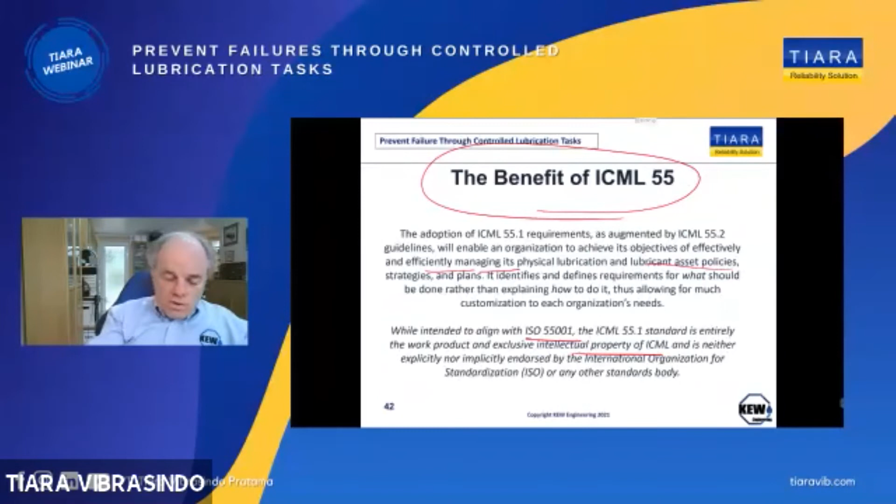And I think it'll become the de facto standard that dovetails in very nicely with the whole ISO 55000 ideology. So in terms of who benefits from ICML 55: asset planners, asset practitioners, and asset-rich businesses, of course. All of those are candidates for ICML 55. They will benefit from the ICML 55 standard.

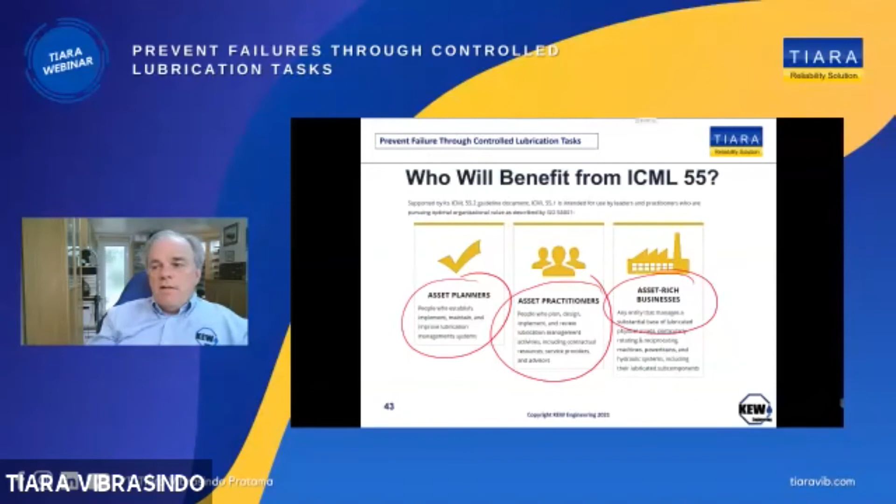What assets are covered? Basically, reciprocating and rotating machinery, any asset that requires lubricants, any finished products such as chain ropes, chain greases, wire rope lubricants, things like that are all covered by the standard. And then, of course, the non-machinery support assets - the people, the personnel, the procedures, as we've been talking about, the written tasks - all of that is covered by ICML 55.

So what fluids are not covered? Basically, anything that does not serve a lubricant function. So it doesn't cover fuels, it doesn't cover independent additives that are sold separate to lubricants, it doesn't cover transformer oils, it doesn't cover solid lubricants. So it is primarily focused on lubricating oils derived from either crude oil or Group 4, Group 5 synthetic-based oils.

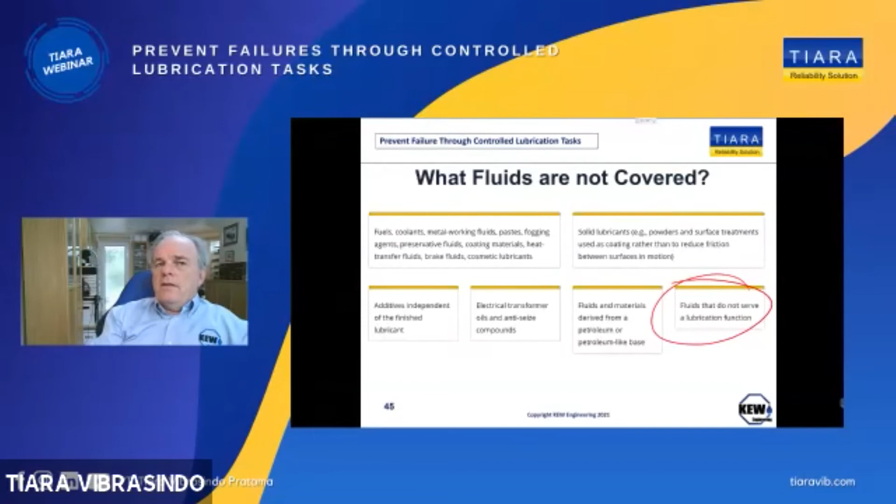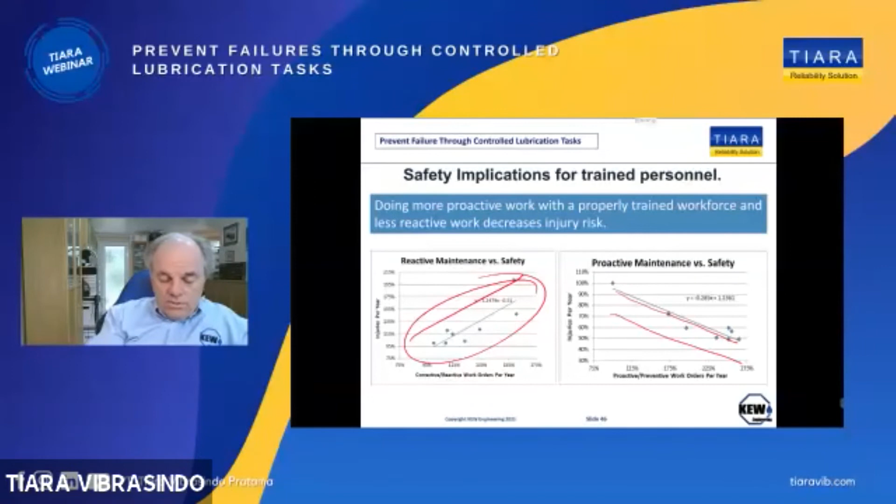So I will leave you with that thought and hand it over to questions. So thank you very much for your time and effort and listening.

Okay, thank you very much, Martin. There's some questions from the participants. The first one is coming from Pak Deprian. He's asking about how to start creating procedures for a big plant with a big maintenance team that hasn't had any procedures before. Maybe how many people can create this, or maybe you have an experience to share.

Yeah, if you were to bring in an independent contractor to physically do this job, then for the lubrication aspects in a big plant, we're talking maybe 3-4 weeks for an independent contractor to work through everything on the site and create the procedures for lubrication. That's probably the extreme limit.

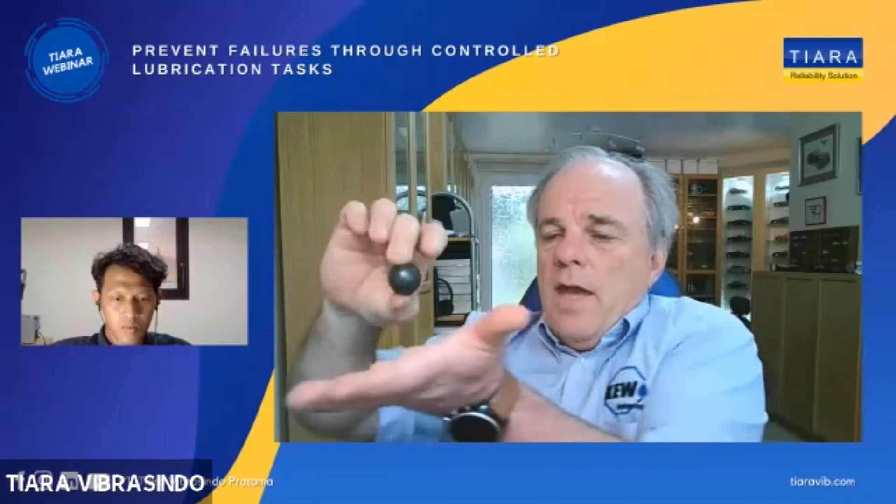When we overfill with grease, we pack too much grease into the path of the bearing. So for example, here's a bearing element, and as that bearing is rotating and moving around the bearing race, it will push the thickener to the side, and the oil will then lubricate the bearing surface. But if we overpack the grease, then the bearing has to keep pushing the thickener out of the way, and that creates drag, and drag then becomes heat. And that's why when you overgrease the bearing, it overheats, and it will stay hot for a long period of time, which will then reduce the potential service life of the bearing.